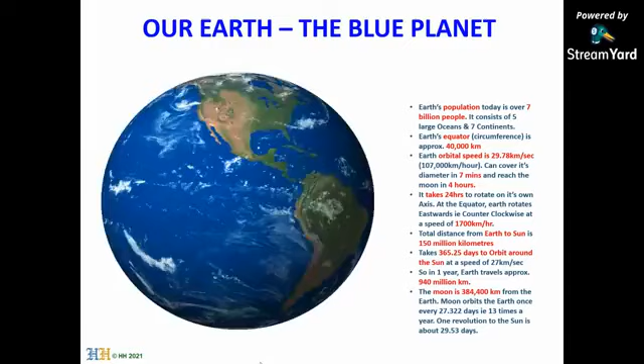Next slide, please. So why God created this water is, as we all know, water is life. 70% of our planet consists of water, and also 70% of our body is made up of water. For example, if you're 70 kilograms, your weight, 49 kilograms is water. If you squeeze the water out, then the balance is what is your body.

So if you look at the skin, it consists of 80% water. The liver is 75% water. Blood, of course, is 90% water. So to have a good life and good health, you need good quality water. If you consume not good water, or polluted water, or the wrong type of water, then that is where the first defense of your health system will actually start ruining.

Hence, the importance of water and sanitation. Engineers around the world provide good water supply systems and sanitary systems, hence make the human life and also the life of all beings sustainable. So if you don't manage this water well, it will have an impact on everybody. Next slide.

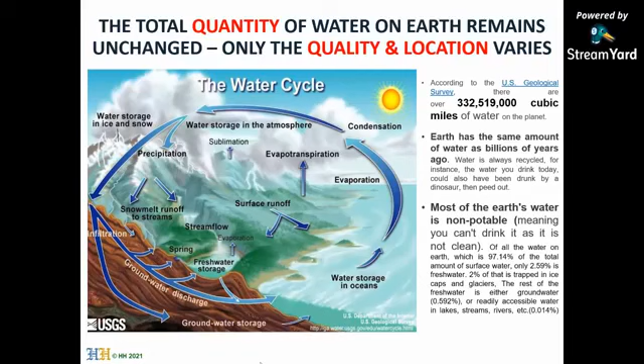Non-potable means not suitable for direct human consumption, meaning the water is saline, with a lot of salt in it, and hence you need technology to recover or capture this water for potable usage. So 97% of the water is in the seas, leaving only about 3% of the total volume of water as fresh water on planet Earth.

And from this 3%, scientists have further discovered that close to 69% of this water still sits in the ice caps and the glaciers. Sometimes you hear about the ice caps melting, and hence the sea water level actually rises. So this is where the water balance comes in, and the location starts changing.

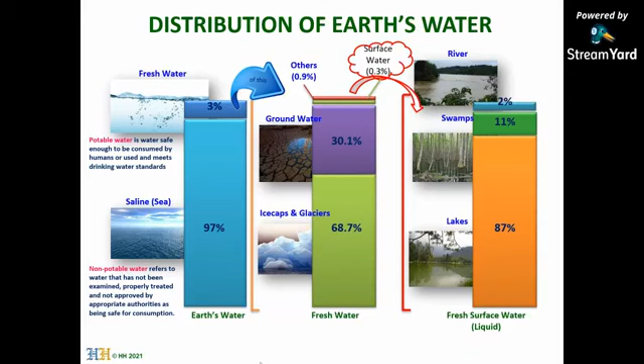In the Quran, Surah Al-Mu'minun, chapter 23, verse 18, God Almighty said: 'And we sent down from the sky water in due measure, and we gave it lodging in the earth, and verily we are able to take it away.' So if you look at the water cycle, there's actually plenty of water around.

So of course we always talk about no water, especially in Klang Valley here, very too often we get polluted water and also water cuts and so on. So we have to look beyond to actually look at other sources of water.

Singapore, for example, is surrounded by water. The island is surrounded by water, yet the real surface water they have is only a very small percentage. Hence, they have started research on this water, and also implementation of new taps within Singapore, and that's why they are quite water rich today, although they don't have much resources. So likewise, many other parts of the world need to further exploit the potential of water around them.

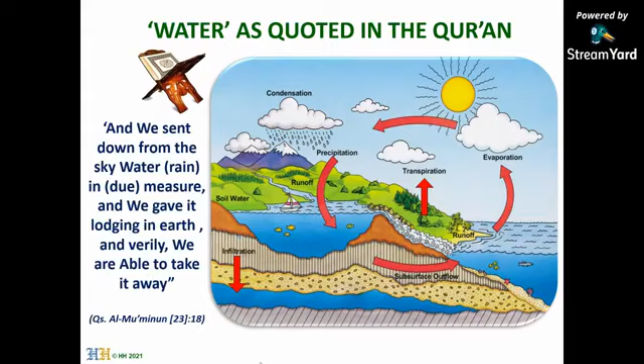The fact remains that we are still very dependent on the 1% surface water on this planet Earth. The 99%, bulk of which are sitting in the seas and oceans, we have not exploited to the optimum. We have desalination facilities and so on, but the technology is not commercially viable, it's expensive. There's still much more to be exploited. This is where I think the focus for the next two decades needs to be, to spend our knowledge and expertise to explore further.

I give you an example of the telecommunication industry. Not too long ago, in year 2005 if I'm not mistaken, when people told me we could actually see faces on the phone, to me that was unimaginable. But today, 15 years on, almost everyone on the streets has a phone which can see faces and hear voices. Even now we are talking from many parts of the country, watching this webinar, through this cellular technology. Likewise, I believe in time to come, if we really spend much more effort on exploiting water technologies, there's many more breakthroughs to be found and made use of for mankind.

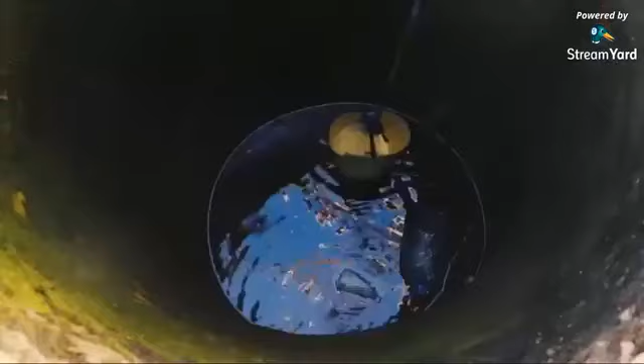These salt water from the wells are not treated.

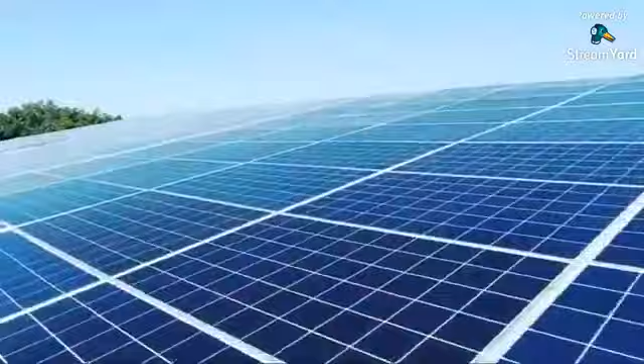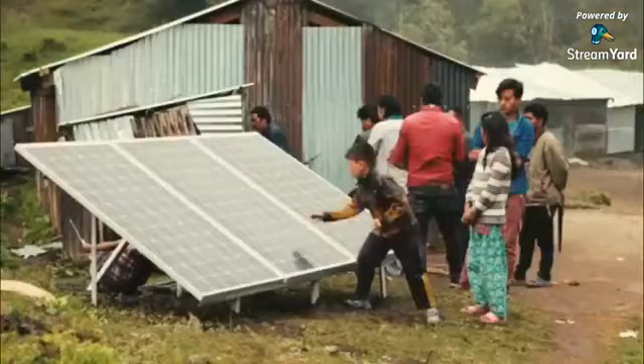Through clean energy innovation, GivePower provides food, water, and electricity to people who need it most. It started with putting solar on 2,500 schools in 17 countries. Then we realized very quickly that we could light up the whole village. The next evolution is, what are the most important end uses for human beings that need electricity? We believe the number one is water.

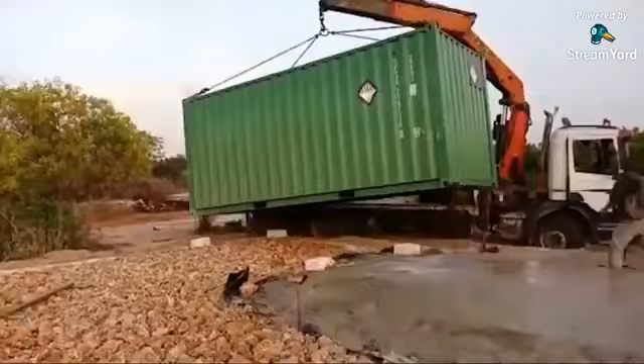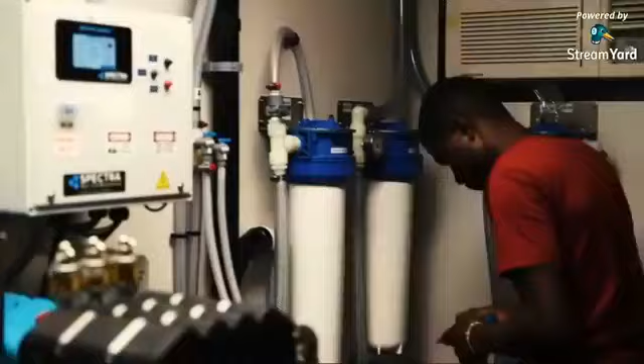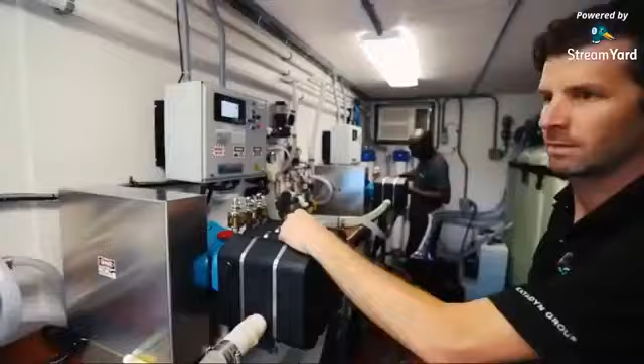So recently we just did an installation of our first microgrid water desalination system. The solar itself is not the end, it's the means to an end. We took a 20-foot container and integrated a 75,000 liter per day system designed specifically to work with a solar panel array. When we turned on the tap, for obvious reasons, everyone was pretty excited.

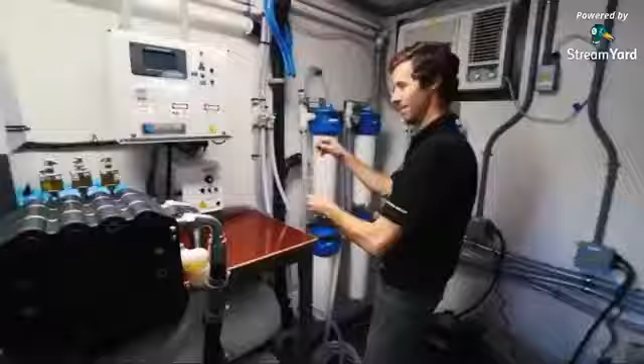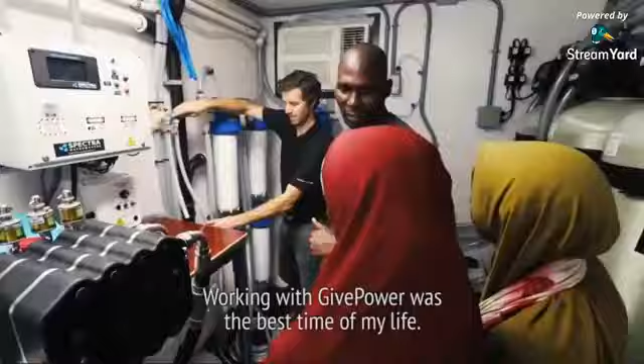I think having gone through so many years of water being such a scarce commodity, I'm not sure they entirely believe it. Working with GivePower was the best time of my life. Desalination in Kenya, it's a beautiful initiative. The GivePower solar water farm produces enough clean drinking water for 35,000 people every single day. It's clean water, fresh water, good water.

GivePower now has the opportunity to scale this solution to help people in dry coastal regions around the world that desperately need clean water. So we're already underway in Colombia with our next system, and now we're zeroing in on Haiti.

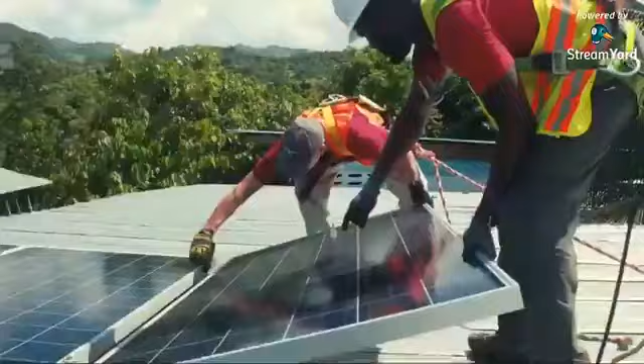How do you bring people out of poverty, but do it in a way that does not destroy the environment? We are focused on how we can help scale the solutions that are out there that can help address water shortages. As GivePower expands its reach, that is helping improve financial lives all over the world, which is at the core of what Bank of America's purpose is all about.

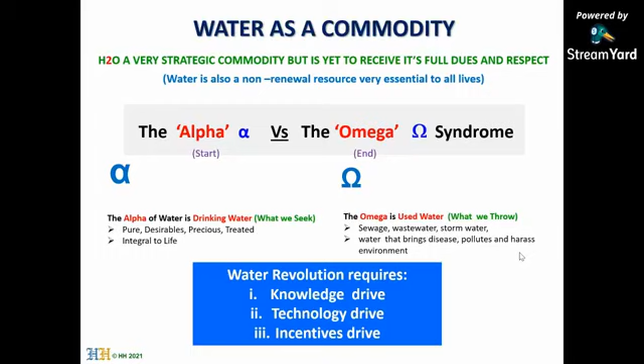And this is where the water cycle actually comes in. So water, sanitation, and health are very closely knitted and related. So in the syllabus, in teaching, and anywhere, we always have to sell this WASH concept. Otherwise, when you try to sell water alone or try to sell sewerage alone, there's no real value to it. And that is where a lot of time it gets left behind. So this is how we should progress moving forward. Next.

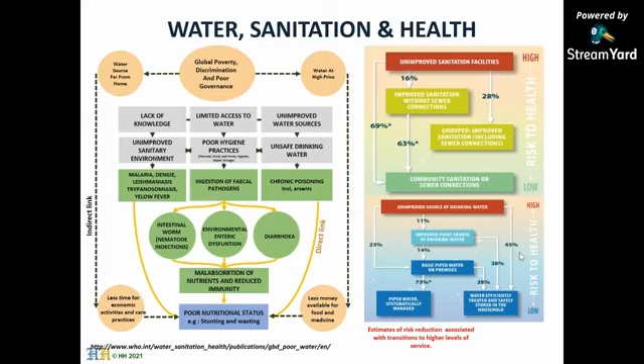And you know we talk about waterborne diseases. Most of the diseases on planet Earth are related to water. When you talk about waterborne diseases, WHO defines it as when at least 2 or more people get affected by consuming the same food or water, then it's called a waterborne disease. The type of disease includes diarrhea, hepatitis, malaria, typhoid, and so on. So you can see that many of the diseases in Malaysia have disappeared, basically because of the good investment in water and sanitation.

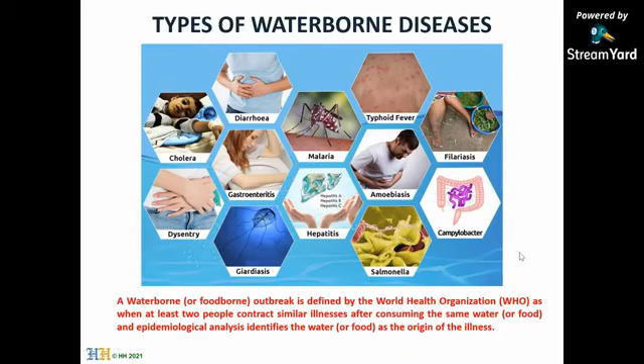But there's still a lot of room for improvement. At a global level, there's still a lot to be done. And this is where the good management of sewerage services at a global level will bring about the balance of the water cycle to a better optimum effect. Next slide, please.

Now today we have to actually start worrying about emerging pollutants. What are the emerging pollutants? You can see from some of these newspaper articles all sorts of waste, including industrial waste, heavy metals, and so on. But one of the worrying ones is, as people become more affluent, they consume more medicine, more vitamins, more drugs, and most of the time only a small percentage of these drugs gets absorbed into the body, and the bulk of it gets washed through the human being system.

And it gets excreted, and it goes back to the water bodies. This is where we have to look at emerging technologies, and bulk of it gets washed out through the sewerage system. So if you don't have the right technology in managing the sewerage system, after treatment it goes back to the environment, and this is where future threats of waterborne diseases will actually arise.

The other day I was watching a movie, which is quite recent. Maybe you can Google and look at a movie called Sea Fever. I think the movie was launched last year. This is about a group of fishermen who venture into the sea using a big fishing vessel right in the middle of the ocean. Suddenly they have a problem and run out of water supply. Unfortunately, the water which they have, and the water surrounding them in the sea, is polluted by some parasites. These parasites can't be seen by the human naked eye. So the water which they take looks good, but it's polluted by parasites. The moment they touch it or consume it, they start bleeding, get infected, and die. Actually, it's a good story for you to watch if you are in the water industry.

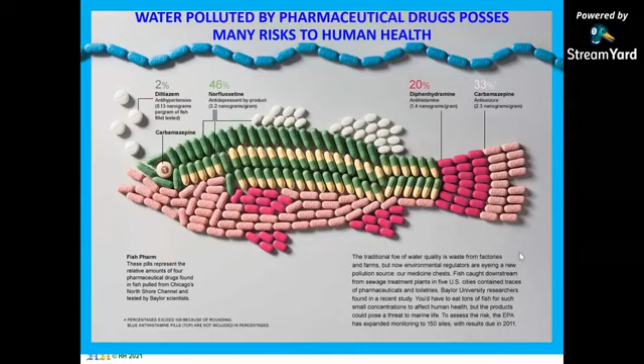Next slide, please. If you look from the global standpoint, this is a snapshot of the world today by UNICEF and WHO. Of the 7 billion human beings on planet Earth, over 2 billion people still globally do not have clean, safe water at their homes.

You can see from the video just now, in Kenya and many other parts of the world, people still walk for miles to get a pail of water. This is where I think, like I showed in my first slide, there's still plenty of water. God has given us a lot of water, but we have not really administrated it properly. We have not actually exploited more technologies, and also made it implementable and sustainable for human consumption. So there's plenty of areas to improve in the water sector.

Likewise, when you talk about sanitation, look at the diagram on the top right hand side. Around 60% of world's population still globally do not have safe excreta management. Close to almost 1 billion people still excrete in the open.

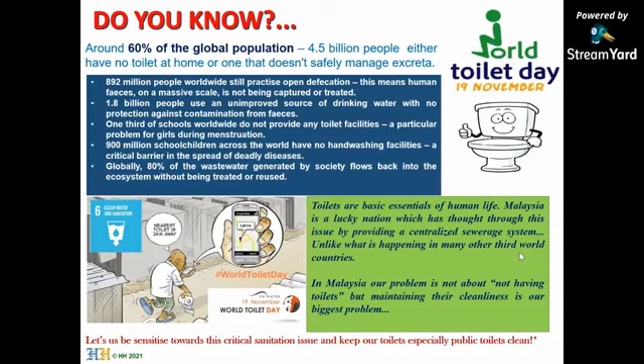The next slide, please. Okay, now I'm going to come to the subject matter, which is sewerage. I've purposely put up this slide. When you talk about utility, the four main utilities which come to our mind are like what I've depicted in this diagram here. If you look at the orange circles, that is the power utility. Now you can imagine power utility: oil and gas, solar, wind, electric power, coal, nuclear facilities, and so on. Where are they?

They are very far ahead. You look at Tenaga Nasional in Malaysia. I think Malaysians cannot tolerate even a 20 minutes power cut. And to praise Tenaga Nasional, I think this utility company has done very well. They have actually supplied power 24/7 throughout most parts of the country. There are still few parts in Sarawak and perhaps Sabah which need further improvement, but generally I think Malaysia is very lucky and our power industry has gone very far.

Now if you look at the black circles, this is the transportation industry. We talk about roads, highways, bridges, rails, ports, airports, transit. I think Malaysia is also very far ahead. They have actually invested a lot, and we have good transportation infrastructure. Today, there's MRT construction. Maybe in 5 years' time, we'll have good MRT systems, rapid systems, like what we have in many western parts of the world. If you look at the green circles, this is the telecommunication industry.

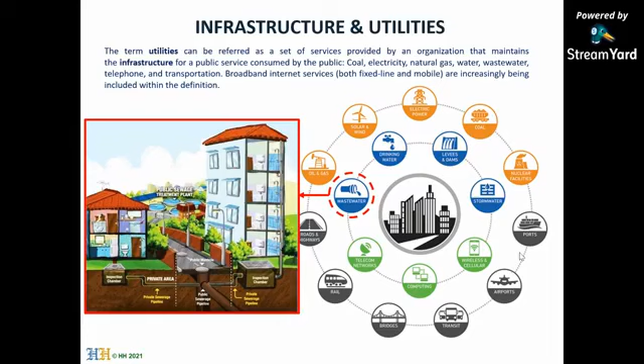And to elaborate this, I will demonstrate a few from the remaining of my slides.

Next slide, please. So another fundamental which we need to understand is the definition: what is sewage and what is wastewater? If you look at the diagram on the left-hand side, sewage is basically all the discharges from domestic or municipal activities. For example, in a house, bathing, washing, gardening, kitchen waste all ends up either as black water or grey water, and the combination of all this is called sewage.

Again, both of these ideally should be managed holistically. In Malaysia, I think we are lucky sewerage is managed holistically, but wastewater is still very fragmented. Sewer lines can be used to actually receive compatible wastewater. This is another area of investment which needs to be looked at if you want to focus on the water cycle and explore further good management practices.

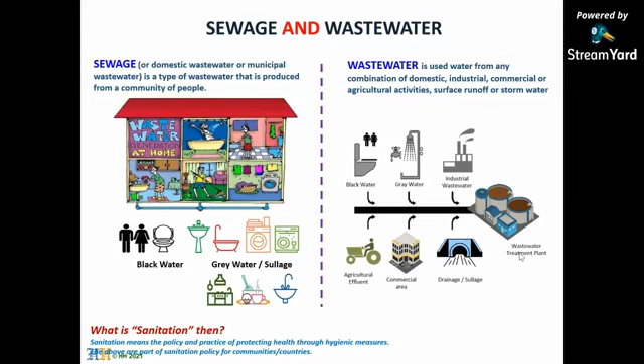Next. So these are some definitions of sewerage system. Basically, anything that comes out from the habitable building is called sewage, and the system which is connected, leading towards a treatment plant, is called a sewerage system.

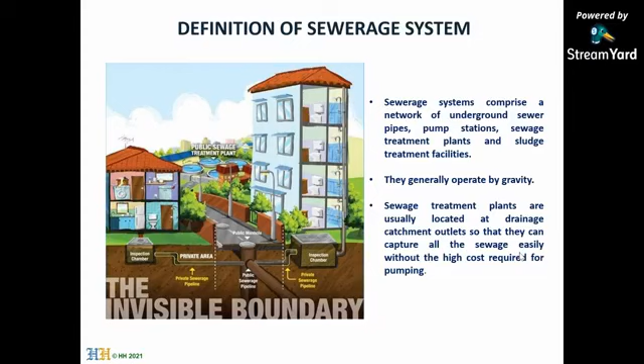Next, there are three common types of sewerage services. The first type is what we call a connected system. This is where properties, the premises, are actually connected to a series of pipes, and the sewage is channeled through these pipes to a sewage treatment plant. This is what we call type 1, or connected system.

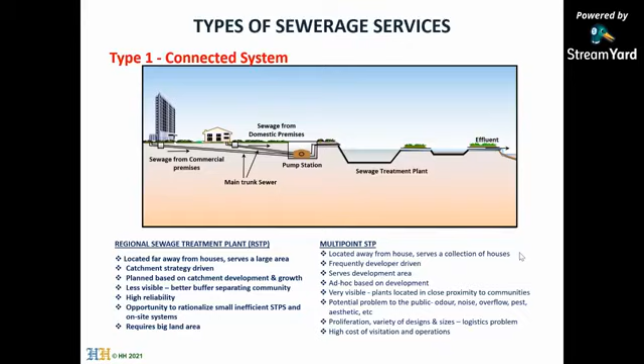The next system is what we call an on-site system, or in Malaysia we very often call it a septic tank system. This is basically where all the wastewater from the household or premises ends up into a magic box, normally at the back of the house. Of course, some are in the front of the house.

It goes into a black box, stays there for about 1 or 2 days, and it actually overflows into the nearest watercourse or through a filtration system. This is technology appropriate for today, but maybe in the future we have to revisit this technology. Within the 24 or 48 hours retention, sludge will settle down, and the settled water effluent will overflow.

But over time, if you don't desludge, like in Malaysia, there's over 1 million septic tanks. I can bet you today less than 5% of the septic tanks are being desludged, meaning 95% are not desludged, and hence we talk about river pollution in isolation. The day-to-day overflow of this sludge, not being desludged, enters the nearby drain and then the main drain and rivers.

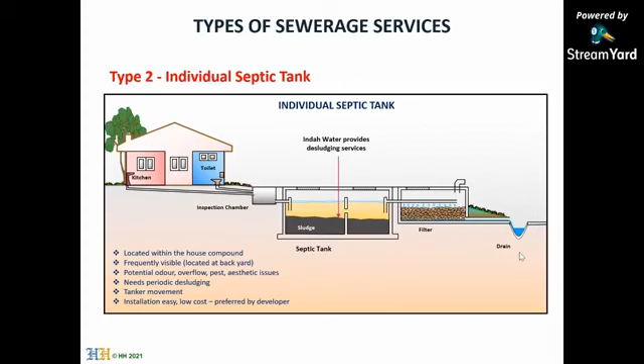This is another cause of organic pollution in many of our rivers today. In totality, there's a big portion of sewage and septic tank discharges polluting many of the rivers. While many treatment plants in the country are seen to be meeting the effluent compliance standard, pollution remains. These are some of the real key issues which need to be tackled from the water cycle point of view.

Next one is what I call the primitive system. Primitive systems are from the old days, the ancient days, or the colonized days. We have things like bucket latrines, pit latrines, overhang latrines, pour flush. You think these systems are not here in Malaysia? You'll be surprised - there's over 1 million systems like this in Malaysia.

If you don't believe me, after my lecture here, now it's PKP, you can't go out. But after PKP, take your motorbike or car and drive along any of the river systems in Kuala Lumpur. If you take Sungai Klang upstream, Kampung Perembang, Kampung Puah, all these rivers upstream, you will see hundreds of these types of systems along the squatter colonies, which directly go into the environment.

There must be a plan to actually eradicate all this, and there must be a time frame in the plan. Somebody should monitor this and take serious effort - these are technologies which were good in the past. Before Independence Day we were okay, but today it's not okay to have this sort of system.

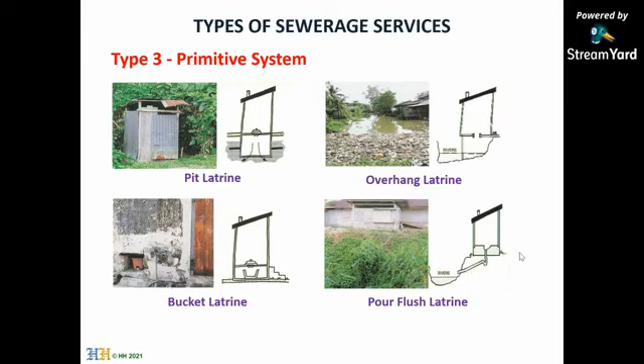People still throw all sorts of things into toilet bowls, including brushes, cloths, toys. If you don't have a manhole, the sewer system will get blocked and won't function. As a rule of thumb in design, about 300 feet, or 100 meters, apart, we have manholes, and of course at bends and so on. Manhole means a man entrance - men can enter the hole to do maintenance, and when they enter, they go with advanced equipment.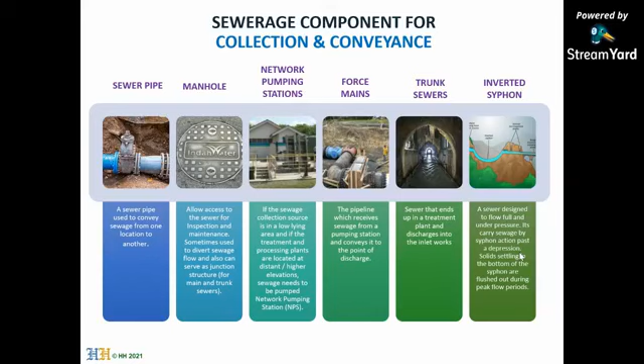So these are all components of the conveyance system. You can have many lectures on just the conveyance system, but here I'm not going to talk too much on the details of the collection system.

These are some pictures courtesy of Indah Water - many of their staff. For information, many of them are experts: engineers, scientists, also technicians. They monitor the blockages, the breakages, using CCTV and a lot of advanced equipment. Maybe 20 years ago we didn't have many of these, but these are progress.

Through this maintenance work, you don't see a lot of fountains in the road, you don't see a lot of overflowing manholes. Of course you cannot be nuisance free, but I think what's important is their response time, and I think they are quite good in their response time - they respond quite fast to many of these complaints.

They have also adopted IR 4.0 - many of their systems are actually automated. The moment a complaint comes, it goes into the handphone of their operators and managers. So if the operator doesn't do the work, their managers know; if the managers don't do work, their big bosses will know, and the works get done very fast. This is progress, and many parts of the world don't have all this. So Malaysia can really export this expertise, and this is where capacity development sets in.

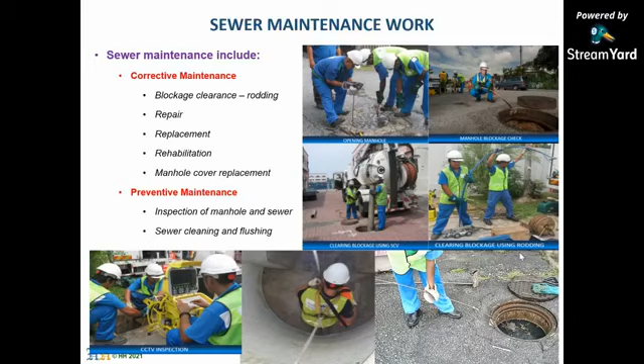In this liquid stream there's a lot of technology involved, a lot of improvements. This morning, when I was giving a lecture to the MIGHT forum on technology development, I shared a lot of ideas that we have to move away from Victorian technologies - meaning technologies of the past. Victoria, by its name, originated from Britain, Great Britain. These are technologies which use a lot of resources, for example, big land area.

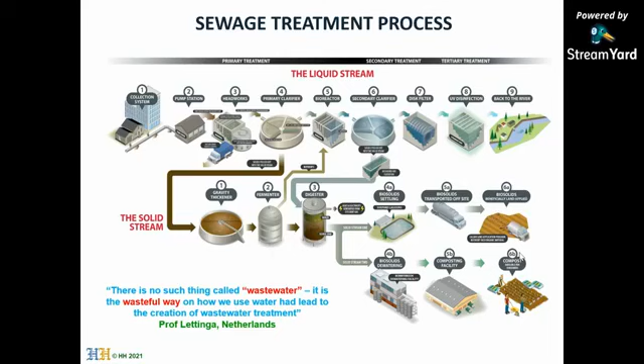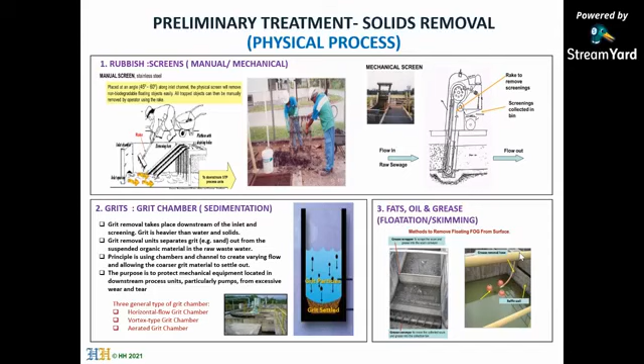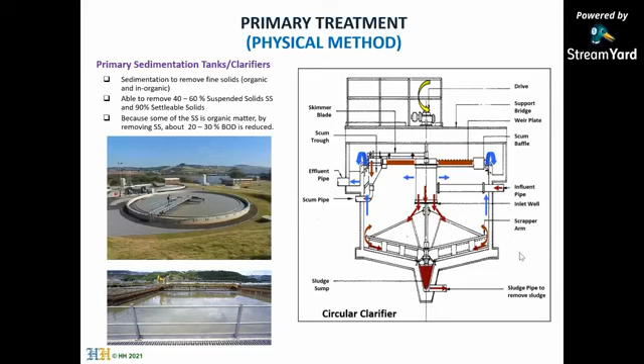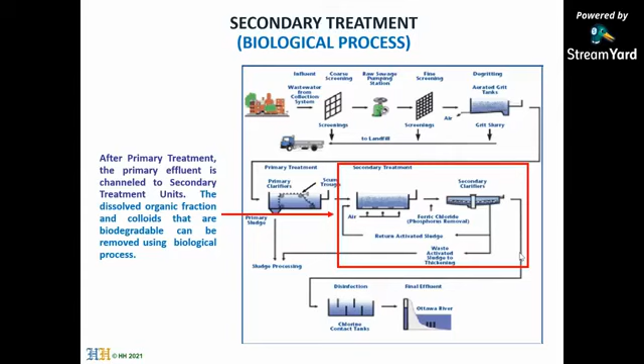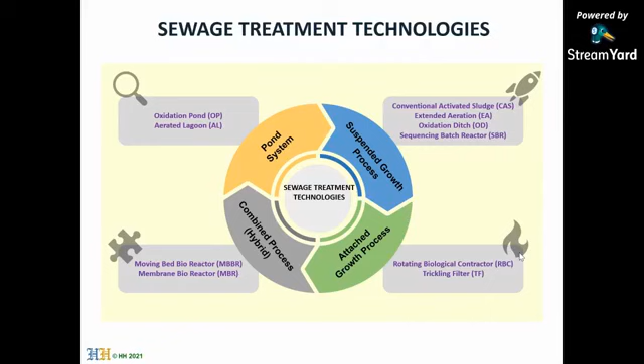And today, if you look at some really advanced countries, including France - in southern France, if you Google, you can see that the entire sewage from southern France, including some compatible waste, goes through a series of pond systems. Because in southern France the climate is quite hot and humid, you've got sunlight, you've got wind, and so on. They use a combination of pond systems to still treat it.

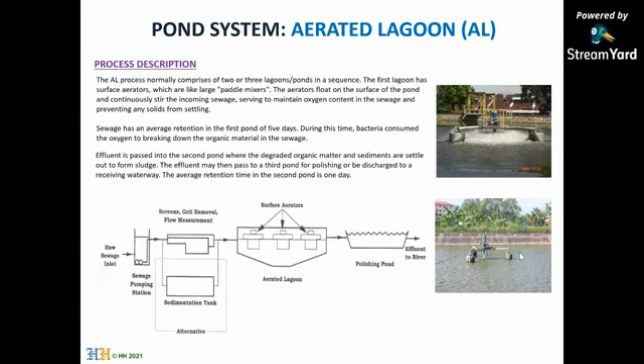Pond systems are also further enhanced by introducing aerators - next slide, please - we call it the aerated lagoon system. The only difference here is instead of depending much on natural wind, we introduce induced aeration in the form of diffused aeration, surface aeration, and a combination of these. I think there's a lot of industry in Malaysia which have mastered this technology, and some have also locally fabricated some of these aerator equipment and so on. Next slide.

Basic system. Again, these technologies were developed basically in the UK in the early days.

I always like to share this story. In UK, a town called Manchester, as many people know, they are a very close rival of mine. I'm a very close supporter of Liverpool, but I have to mention Manchester because one of the first sewage treatment plants in the UK was actually constructed in Manchester.

And those days, before the sewage treatment plant, they had something called a sewage farm. A sewage farm is nothing other than a piece of land where they go and dislodge all the sewage and just dump it on the sewage farm.

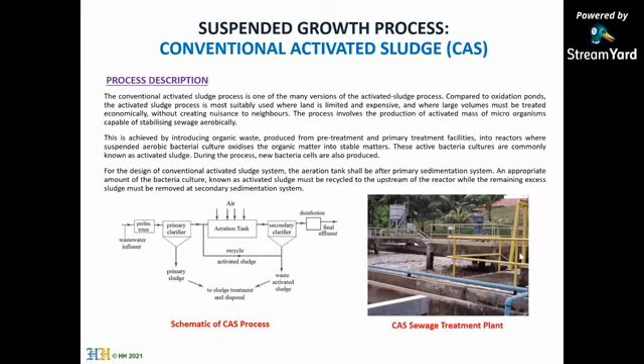In the early 90s, or late 80s actually, I went to Australia to learn this technology, came back, introduced it to City Hall, and we built this first plant in 1988, if I'm not mistaken, completed in 1990. And this was the technology then. And why extended aeration?

Because in comparison to conventional activated sludge, you use extended aeration, meaning you utilize the aeration system to actually treat the sewage better, and you get a better quality effluent. But today, there's a lot of extended aeration plants in the country. I think our problem today is high energy costs, so now we have to look at technology to bring the energy cost down, and this is where we need to relook at some of this technology. Though I introduced this technology in this country and also introduced the guidelines, I put a lot of design principles into it, but I myself, as the contributor, am highly recommending to move away from this technology moving into the future.

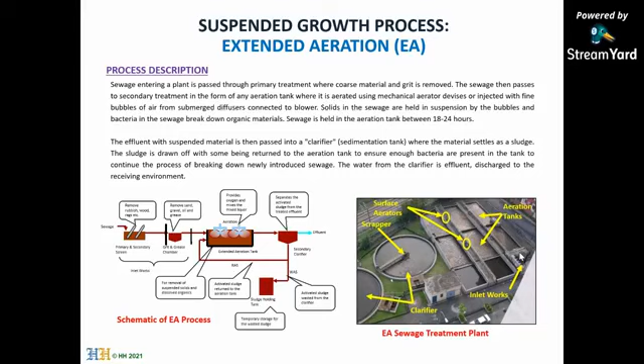It was introduced in Sungai Besi Regional Plant in 1994-97. But again, Japan has mastered this technology - they came out with Nippon Kokan oxidation ditch facilities and improved the brush aerators and so on. But this is a technology which I think is still very much relevant, though more thought must be put into it to move forward. It also comes in either oval or circular versions. I can give a lot more sharing, but due to time, I have to cut short. I'll just share pictures for you to understand.

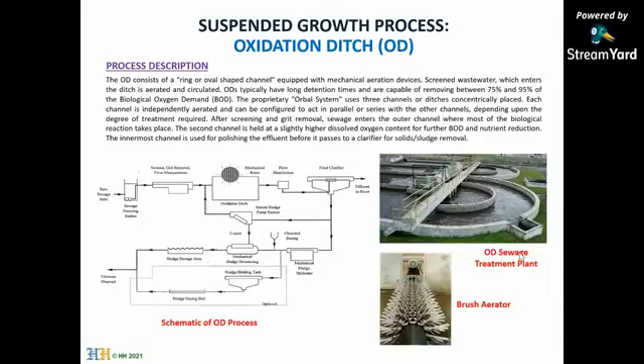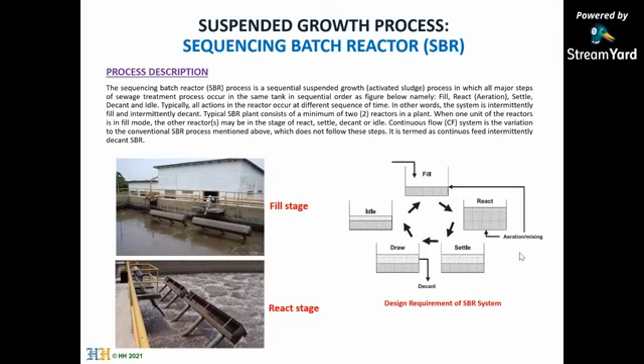The plant is designed for 1.2 million population equivalent, of course the biggest in Southeast Asia. Currently the connected population is about 600,000. So we have also advanced on this technology. The point to take is, Malaysia has now mastered many of these technologies, but what we need is for our local companies, contractors, consultants, and operators to perfect these technologies and also export them, because as I said in my earlier slide, there's a lot of room for us to progress in this water industry. So again, SBR is a good technology and an improved version of the conventional activated sludge.

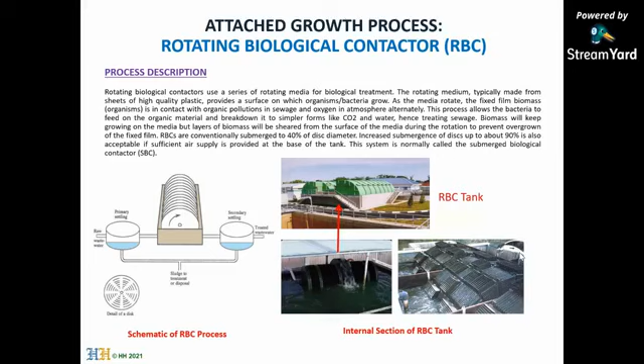And then today we have various versions of the RBC, SBC, and so on. But what really lacked was that we didn't really master this technology further. I still believe this could be one of the technologies moving toward the future - a combination of a fixed growth and a suspended growth system. So perhaps people in the industry and also the universities should focus more on this sort of technology.

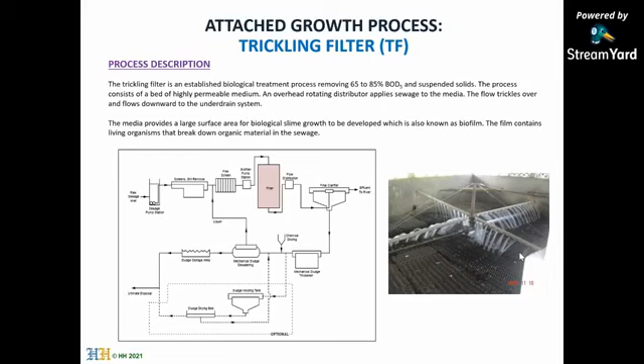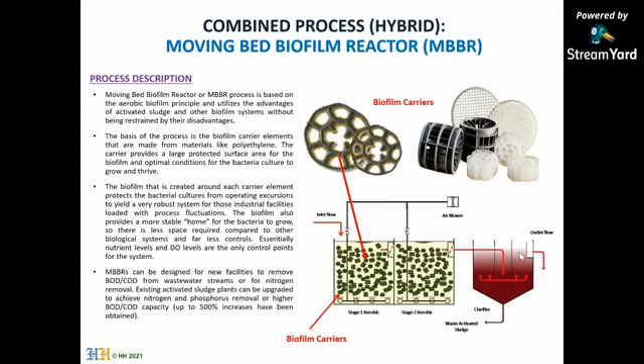The next technology is MBBR, which is very similar to what I mentioned about the combination of activated sludge and RBC. These are the improvements to the technology, and this is the direction technology is moving. So I guess it's time to relook at the national guidelines - time to actually narrow down the options so that you don't get a combination of too many different technologies put into the market, crowding the market, and preventing optimization of the technology in the country.

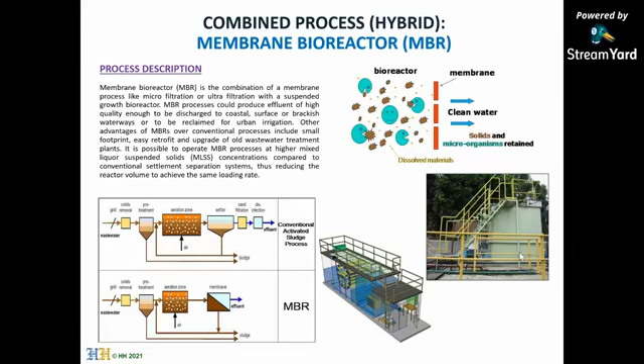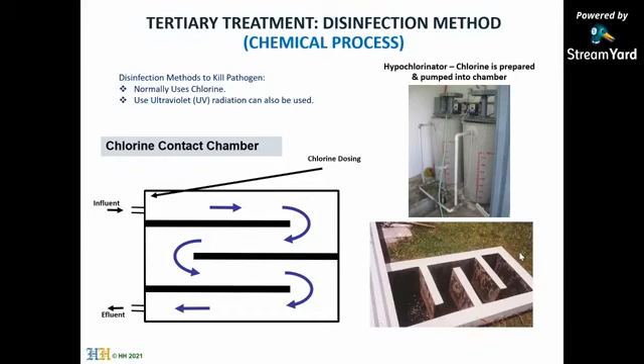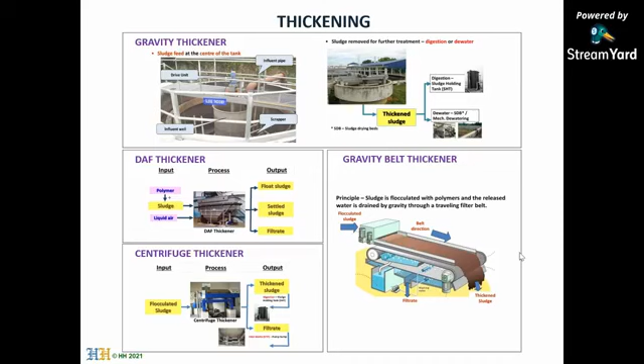When it comes to sludge facilities, you've got thickening. Thickening basically takes it from 99% water down to about 95% water - that means you increase to 5% solids. You've got gravity thickener, dissolved air flotation thickener, centrifuge thickener, gravity belt thickener, and so on. There's a lot of science behind all this. Perhaps in future lectures we can share more.

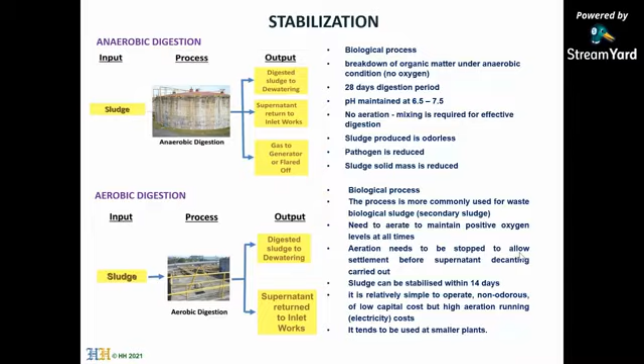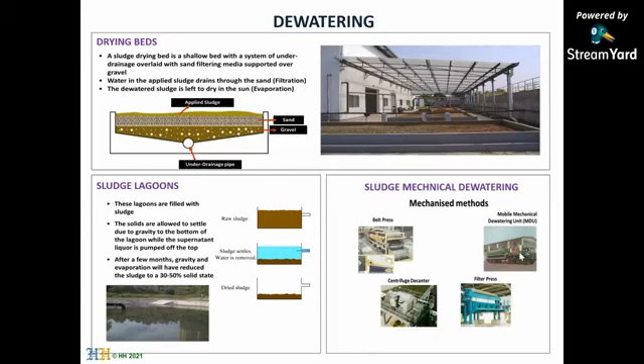You have sludge lagoons. In the past, one of the first sludge lagoons I was involved in constructing was in Puchong. UTM was very much involved in the study - it was more for research purposes to see the effectiveness of sludge lagoons in dewatering. From there, we found that maybe it's not so suitable for our climate, so we moved on into mechanical dewatering. In mechanical dewatering, we've got many types, from belt press to centrifuges to filter press to even mobile mechanical dewatering machines.

In terms of guidelines, there are many, but all these guidelines were appropriate for a period of time. They need continuous improvement, so from time to time - maybe at least every 3 years, if not every 2 years - they must be updated. Likewise, today we have sufficient water acts. What we need is more rules and regulations to actually further develop the industry. These rules and regulations must not be made as a limitation for the industry to grow - they must make the industry grow. This is a very important prospect. That's why if you look at the telecommunication industry through the MCMC, their regulations are very industry driven - that's why a lot of telcos developed over the last 10, 15 years.

Power sector is the same. A lot of IPPs actually grew because of the electricity ST regulations. So likewise for water, I think we have to move away from the police and thief sort of regulation into a more progressive and incentivized regulation. This is very important for the country to grow towards a more sustainable water industry.

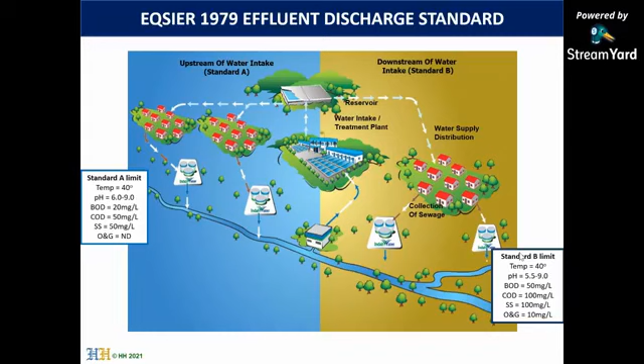These are some of the standards which I won't go through in detail.

I'm going into Sustainable Development Goals. Everyone knows this is a United Nations goal from 2016 to 2030. Today we are already in 2021. There are 17 goals. The latest report card in 2019 shows none of the goals are on track, and even if you double the current rate of implementation, it's hard to meet the 2030 targets.

So we really need to work very hard to meet the United Nations SDG goals globally. And at least 8 of these 17 goals are quite related to water, as I picked up from here. And if you heard the first video just now, water actually helps eradicate poverty, which is goal number one. So if you want to get rid of poverty, you must have good water management, good water planning. If you don't have that, you cannot bring education to society, you cannot bring industry to society, and so on.

Likewise, these 8 goals are very directly related. Of course, the other goals are also very much related to water. So you can see water is holistically sitting as a global target, and yet the water industry is still quite laid back in many parts of the country. I hope Malaysia can one day become the water hub and become the water leader to bring forward the water industry.

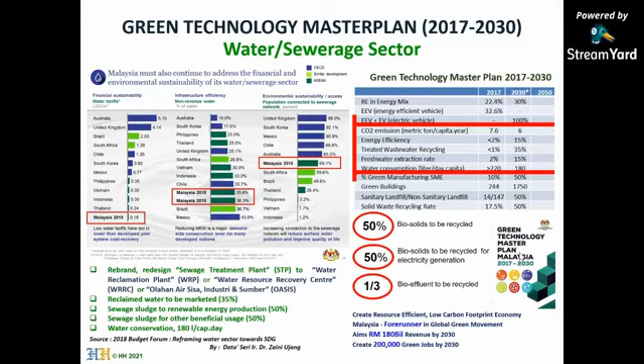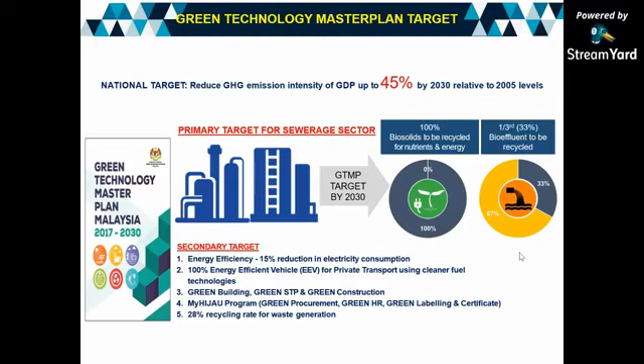For water as well, there's a lot of targets set—primary targets and secondary targets, which I won't delve into in detail. We could have another seminar just talking about green technology and targets. Suffice for me to say, we are very far behind. We have another 8, 9, 10 years, or with this MCO, maybe about 8 years to achieve the targets, and this requires a lot of things: public engagement, policy changes, industry-driven efforts, and new methods of financing. Otherwise, come 2030, we might be talking the same as what we are talking today.

And looking back at the water cycle, I spent the last hour or so talking about the correlation of sewerage and the water cycle. I think we should start looking at resource recovery rather than meeting compliance. I mentioned the three main byproducts of sewage: bioeffluent, biosolids, and bioenergy. In any project, any catchment, the catchment strategy should talk about the economics of this and how to make it happen, how to work with industry, how to finance this, so that the catchment plan becomes sellable and acceptable to the government, Ministry of Finance, EPU, and so on.

Otherwise, if you just ask for money to meet compliance, it's going to be a big task, because just to meet compliance level, we are talking about something like 30-over billion over the next 20-over years—1-over billion a year for sewerage. I think it's going to be a big challenge.

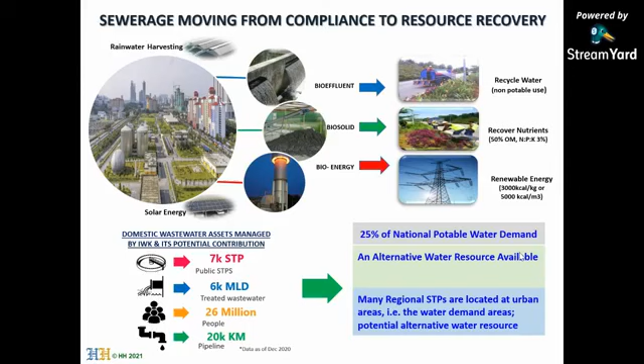There remains a lot of areas which still remain unexplored. In my morning talk today, I showed slides proposing that UTM take the lead, together with MJIT, the Malaysia Japan International Institute of Technology, to explore many of these technologies and make Malaysia a water hub for people to come and develop. The university must work with industry to develop this and to export it—there are many areas to be exported based on this technology.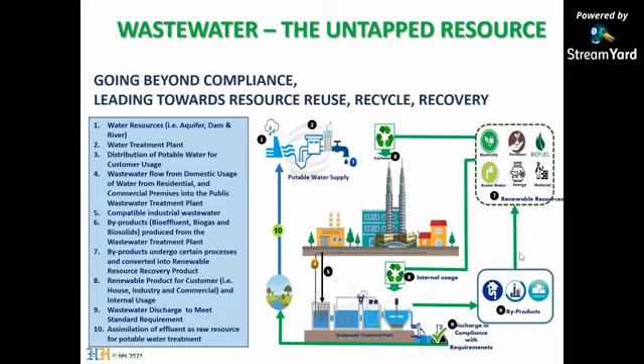I'd like to talk about toilets now. I talked about this amount of waste using a lot of water, transporting it, and at the end creating a bigger environmental problem, and spending a lot of money trying to resolve it.

Now, this man here, everybody knows, Mr. Bill Gates, the Microsoft guy, has moved away from Microsoft towards toilet technology now. Not long ago, only two or three years ago, he challenged himself to solve the world's sanitation problem. When he went down to the ground, he found that trying to treat sewage in today's way is not sustainable, so he invested through a foundation called the Bill and Melinda Gates Foundation.

He invested $200 million to come up with a competition, and the competition was open throughout the US and many parts of the world—from China and parts of Europe—to compete.

The challenge is, he took a jar of sewage and displayed it, saying that if someone could come up with an innovation from this jar—because in the jar there are trillions of microbes—if you can exploit and come up with technology to reuse these microbes, like algae, biodiesel, compost, and so on, this would be a breakthrough in technology.

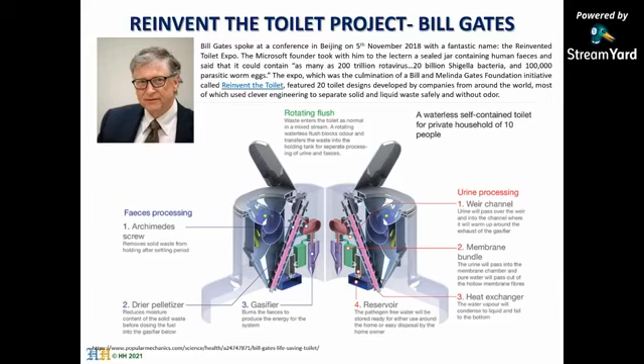Now, how this works—maybe I can show a video. Next slide, please.

I want to talk to you today about toilets. In rich countries, you just take the toilet for granted. It's magical that there's a sewer system bringing water in, taking away the waste, and it all gets cleaned up in a processing plant. However, for the poorest 2.5 billion in the world, they don't have this.

It's unaffordable. We can't build that for everyone in the world. Some of the poorest, their toilet may look like this, a pit latrine. The waste here is not processed. It's still going to get out into the community. They smell terrible. But everybody should have great sanitation, a toilet in their house that is comfortable and doesn't smell awful.

Not only does a toilet make your life comfortable, getting rid of that waste is key to human health. It's unprocessed waste that causes most of the diarrheal diseases. It ends up with lots of kids being malnourished. So how do we solve this?

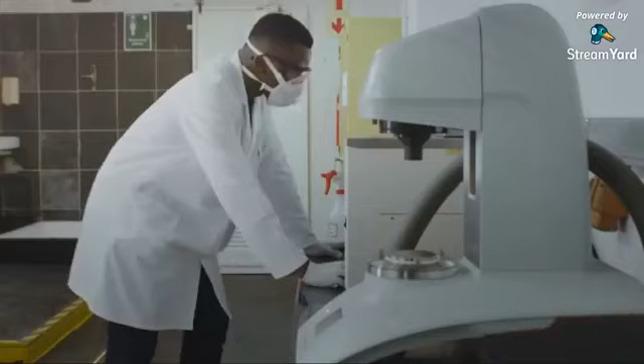Well, some scientists that I work with said that we should challenge the world to come up with a way of taking the waste and processing it locally. We call this the program to reinvent the toilet.

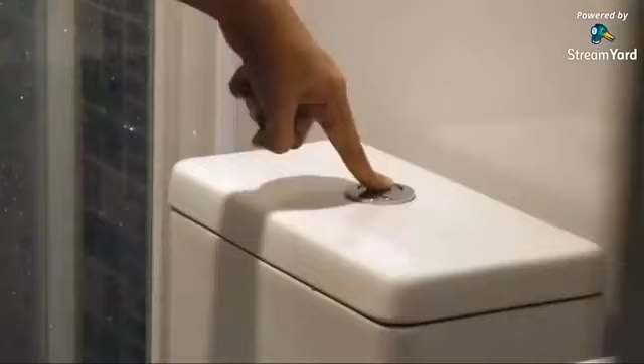Several reinvented toilets are being tested right now in Durban, South Africa. Durban's a good place to run these tests because the city is growing fast and many people there don't have modern sanitation, which means that even if they have access to a toilet, the waste can get into the environment and make people sick. A typical toilet needs water, but many of the new approaches don't require any water at all.

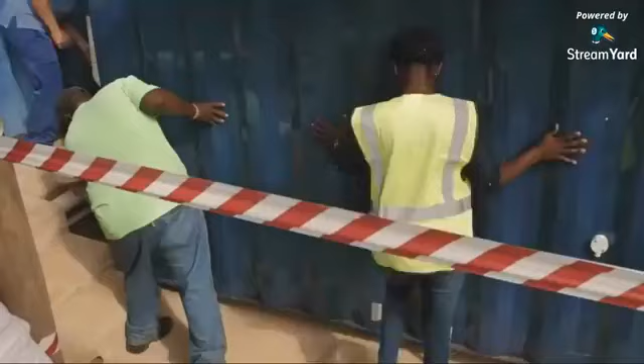Some of them don't need electricity either. Others run on solar power. All of them remove the pathogens from the waste. And most importantly, they don't have to be connected to the city sewer system. I'm optimistic that eventually we'll find approaches that make great sanitation available to everyone.

Okay, that was a brief idea of how to reinvent the toilet. So, like I mentioned this morning to UTM, I think they should get their researchers to focus on reinventing the toilet, so Malaysia can be an exporter of the new toilet system and further improve the way we looked at sewerage in the long term to come. So you could be a good exporter.

And the wastewater treatment plant today, I mentioned, rather than looking at meeting the compliance, regulatory compliance of the effluent, I think all the wastewater treatment plants today need to be relooked from the circular economy point of view.

So if you look at this plant here, this is a small plant in Denmark, in a small town called Billund. Billund is a very creative town. This is the town where Lego was invented. You know Lego? And if you talk about Grundfos pumps and so on, it all comes from this town. I think the town is hardly about 10,000 population.

Now what they did is they looked at their wastewater treatment plant, they made it energy positive. They looked at the entire water system, reused the water for their water supply system, and the sludge, they did co-digestion with imported organic and domestic waste, and they produced 150% excess green energy, meaning that apart from being self-sufficient for their own plant—zero electricity cost—they sell 150% of the energy generated to the grid.

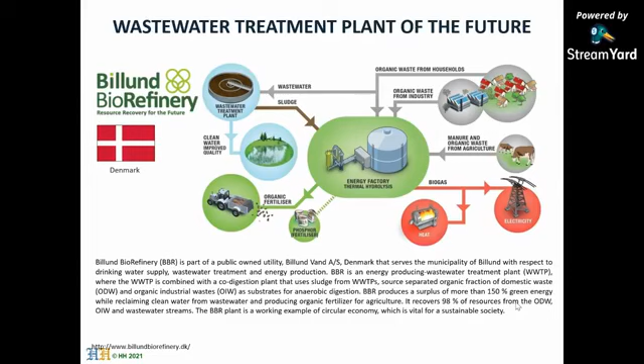I think in Malaysia, we are fortunate. We have come up with a few pilot scale projects using green technology. If you look at this plant, this is the Pantai plant. Remember I talked about the sewage farms. Sewage farm is you take the sewage and dump it into a farm.

So Pantai is a place located somewhere in Bangsar. Today they call it Bangsar South. But if you look around, you cannot find any pantai—pantai means beach—so you always wonder where this name came from, pantai. So Pantai was on the outskirts of Kuala Lumpur during those days, during the British era. They actually used to dump the sludge there. So it was a sewage farm.

Sorry, it was a sewage farm. If you convert, elderly people used to say 'itu tempat padang tai' - padang tai, which converts to jadi pantai. But the name today is known as a Park Lane name. Anyone staying in Pantai, the property value is very high. So that's how the name Pantai came.

So in the 70s and 80s, we adapted from the sewage farm, from a primary treatment system towards a pond system. You can see that aerated lagoon system, and that was a technology appropriate at that time, early 70s and 80s.

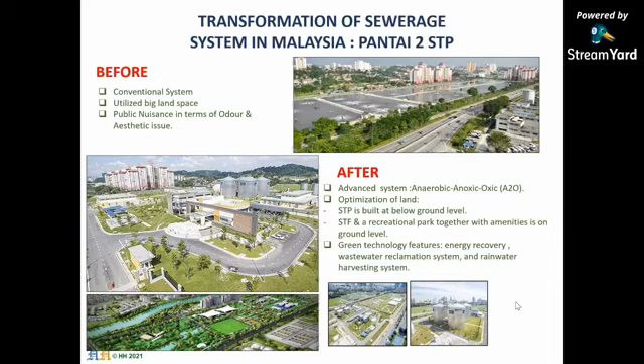What is more important in this slide is the next slide. There's already a demonstration utilization of green technology in terms of solar panels, effluent reuse system, biogas, resource heat system, skylight lighting system, rainwater harvesting, and also efficient equipment system for energy saving. Now this is not the optimum plan, but it's a start.

So I believe in the future, using this as a guide to the circular economy, I think we should present our proposals to the government in a more economic way on how we actually get back value from these sewage treatment plants. This is how you link it back to the economic plus the water cycle, and this is where I think the next 30 years master plan should be looking towards this development.

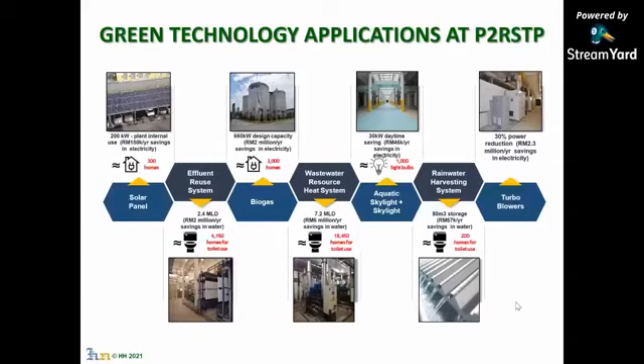The next slide, please. Another quick example is in Langat. This plant is almost going to complete - another showcase plant. They use biogas, solar energy, bioeffluent, and rainwater harvesting.

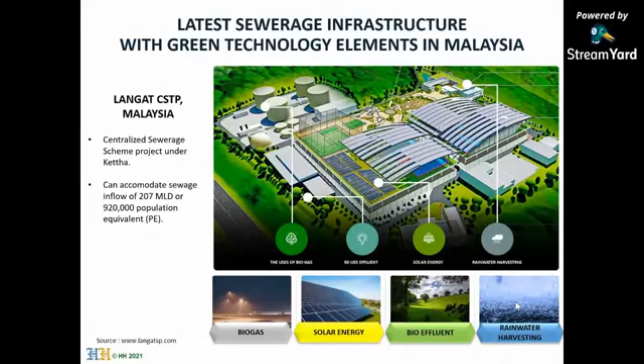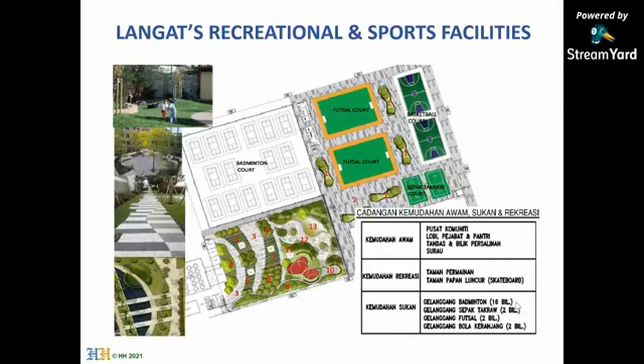This is just for demonstration purpose. Of course, they also have a park on top with sports facilities, badminton courts, basketball courts, and so on. I think one of the things which we need to actually convince the policymakers and the community is the acceptance.

In a very simplistic form, I can say water is H2O. So if water is polluted, means there's pollution in the water. If you use technology to remove the pollution, then you get back H2O - just like our shirt. If our shirt is soiled by pollution, we wash it, the shirt can still be pure, can be used.

So in that progress, when we explained to them and they took their own time to do their own research, they have actually come up with a fatwa, meaning that the reused water and the reused sludge can be reused. They use the word 'harus', which means it can be used. But because Malaysia has plentiful water, only in times of no water can you reuse back the sludge and also the water.

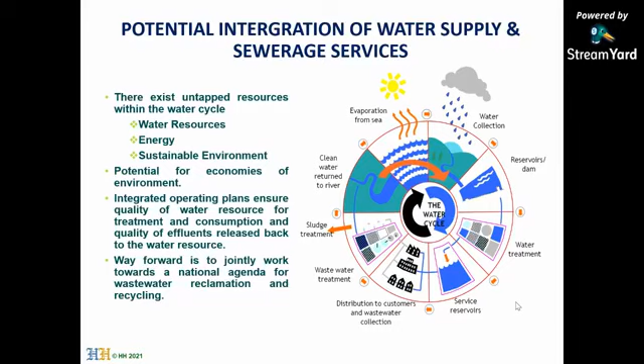We also go back to the water cycle. Every time we have to plan sewerage in conjunction with the whole water cycle. That's where we can do the selling, and in the process, we have to also look at the economics of it in a broader view.

In researching, I think moving away from the typical water cycle which we learn in school, the National Geographic version, we have to now do the research on the real detailed global water cycle, which consists of the natural water cycle, groundwater, raw water, treated wastewater, untreated wastewater, agriculture water, surface runoff, and so on. Only then can you come up with a holistic water global direction moving forward and make water a strategic economical tool for the country, competing with other utilities such as telecommunication and power.

If you keep looking at it in isolation, I think you require many years to get to developed status. Malaysia is fortunate enough to be a leader for many other parts of the world. If we take the steps today, over the next 15 to 20 years we could actually export many things around the world.

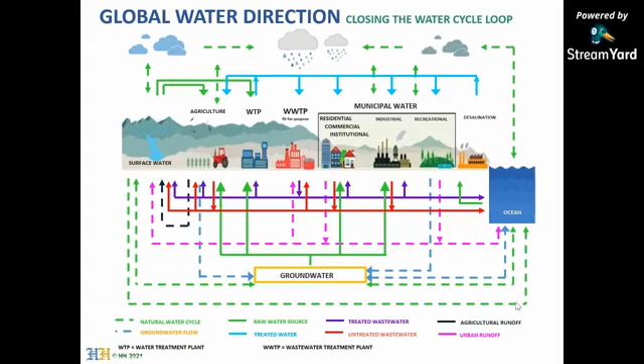So finally, this is one of my final slides. For the last almost two hours I've talked about water and sewage in context of water. In summary, good sanitation and sewerage practices are a very important part of mankind and the environment. There exist many opportunities for improvement in sanitation and sewerage services. The recovering of untouched treasures, the resource recovery, will be the technology of the future. And here, I hope UTM can play a lead, become the lead water university in the country.

Although today I heard there's about 120 over universities in Malaysia, when I was studying there was hardly 5 universities in the country. It was very difficult to study engineering, so you had to go overseas. Today you have many universities, but we must be ready to actually expand on the industry as well. So we have to work very closely with industry, get many industry players attached to the universities, to unravel all these untouched treasures of resource recovery.

Capacity development is key towards this, including teaching, resource recovery, and so on. And finally, looking at water from a holistic point of view in conjunction with the water cycle is more important than looking at it in isolation like currently. So these are the things which will bring our water industry to move forward.